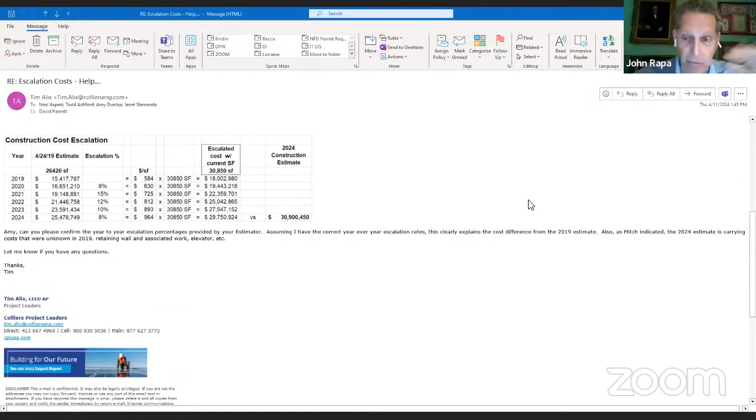So this form itself, I don't think is too digestible, but it helps tell that story in a meaningful way. Chief, you got some numbers on the FAQs as of, I believe, March 27th, where we show the number come from 43.49 to the range coming down. That's in the public domain.

That's out there. So let me show you what I've done since then, if I may. Hang on a second. If I can do this without losing where the heck I am. Hang on.

Northborough. Yeah. Heartland Fire.

I'll go up and share my screen again. I just did this today. So what I did was, can you all see this right here?

That covers the initial cost, the second cost, the committee, when the cost after we approved the geothermal, so it came back up a little bit just because of the numbers. Then the geothermal state and federal rebates, total minus the rebates, what the contingencies are, and if we don't have the contingencies, what the total would be.

Does that make sense to you guys? Yeah, it's going in the right direction. I don't know if I understand the very last line, total if contingencies are not used.

So the contingencies here, those may or may not be utilized in the construction process, right? We may not need any contingencies. We don't have any change orders. We don't have anything.

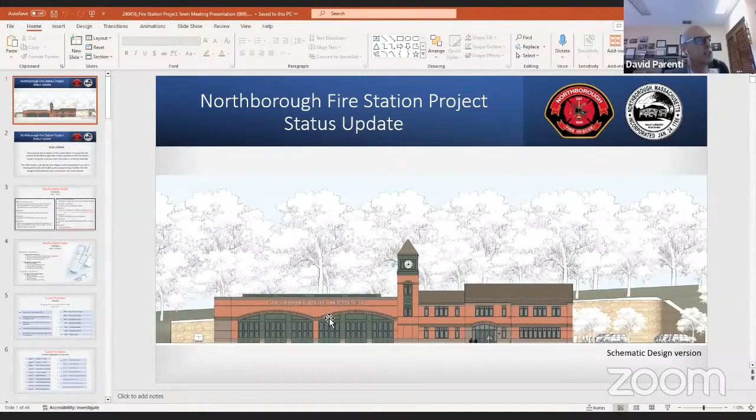So this is page 1 - this is the latest and greatest from HKT with the color scheme and all of that. Okay, we put a disclaimer in that says, hey, this is where we currently are, things could change. They're still in development, they're going to modify as the project moves forward, blah blah blah. So we don't want people to think, oh, this is what it's going to be.

We thought that would be - can you put punctuation at the end of those sentences? Mitch, you got a red pencil somewhere? They're free, you guys are a pain in the tush. My temptation would be to write on my monitor - that wouldn't work out too well. Thank you, hey, we're only getting started, Chief. You know what, you're lucky it's spelled right by a bunch of firefighters.

So, hey, we took the timeline and condensed it into one slide instead of multiple slides. Okay, same information you saw before, just all in one slide.

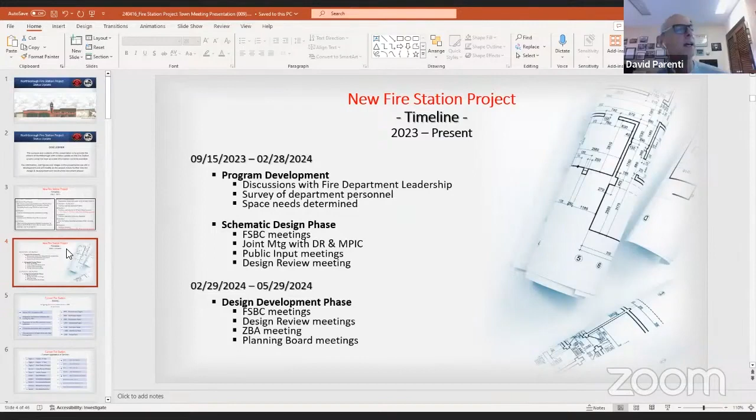We took the current state and condensed it all into one slide, trying to make it easier and quicker to go through. We're not going to read every single thing on here, but the idea is, this is what we've done so far, this is where we are right now.

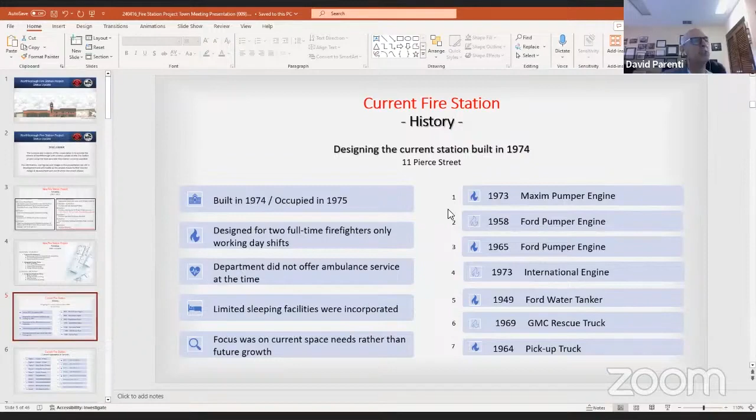We took the history and condensed it onto one slide. So here's the history of the station, and this is the apparatus that was in service then. Current apparatus - you guys have seen this before. Yep, you've seen this before, and you've seen this one before.

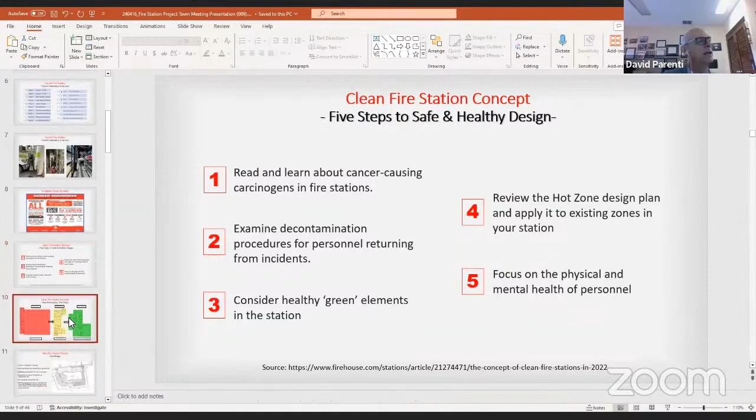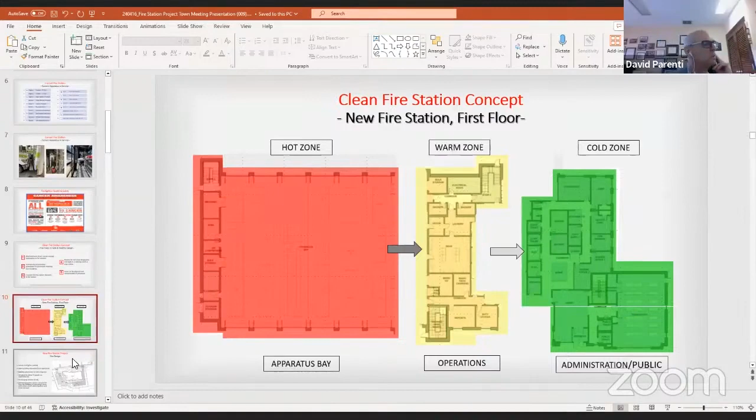This is cleaned up a little bit, it's a nicer slide to look at. It just has the 5 steps to a safe and healthy station design. The Deputy did this for me, much cleaner, looks much nicer. It breaks out the hot, warm, and cold zones, much easier to see, and labels them. Here's the site design.

So here's the first question I have: do we want to put this slide in there? This is the straight wall. Now we've decided we want the batter wall in the back, but the straight wall's on the side. We can get rid of this slide completely - I'm okay with that, that's detail we've gone past. There's a wall there, that's all.

Mitch, how much time do you think the chief has? Oh, I'm the last guy, I can go for hours. I think a lot of people are just going to leave.

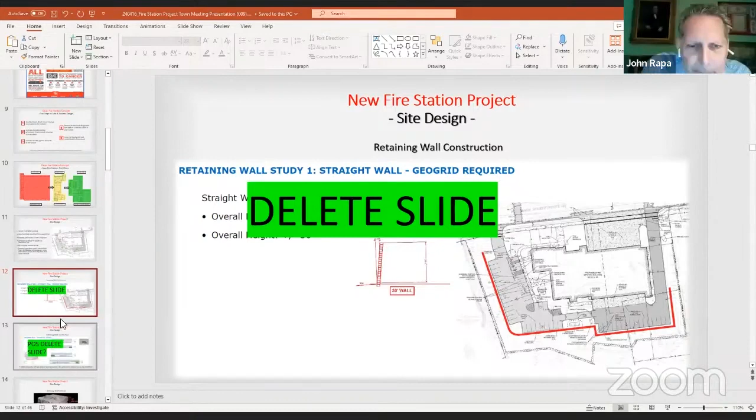I'm not sure if we should aim for something, but detail on the wall options we don't need - my intent is it's going to be more for the recording than the people that are there. So if people want to go back and see it, they can. I think we should get rid of that slide, take it out. Yep, I think we should get rid of this slide, get rid of the batter wall, yeah, okay, get rid of it.

This we wanted to put in, I thought this was important. This is what we picked for the wall - you guys haven't seen that one before. I think that's really an important slide for people to see what it's going to look like.

Okay, but that's a straight wall. It is a straight wall, which is what the side walls are going to look like, but it gives the design so you don't see that ugly wall.

You know how you can tell it's an engineered wall and not laid up walls when you have vertical joints stacked right here, so you can see the big blocks. There's six stone faces per block. But who cares?

So we can leave this one and get rid of this one if you want. What do you guys think? I'm not even convinced we need the first one. But again, the idea is to just give them an idea of how we got where we are, what we looked at. I could have put every single thing up there, and I didn't think it was necessary, I thought it was too much.

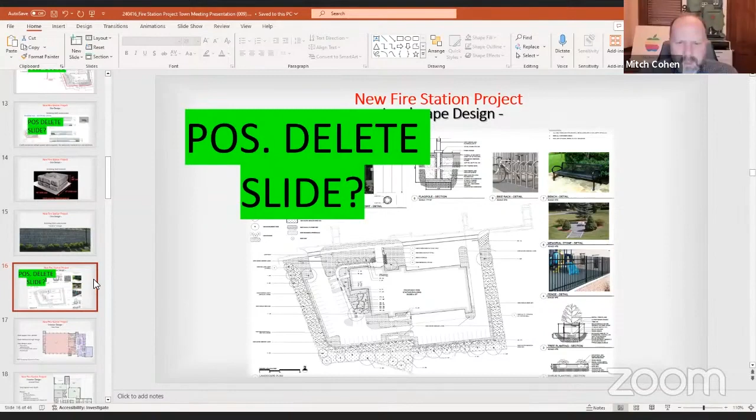I think we know we need a wall, and we're not recommending showing close-ups of the bricks that we chose for the building or anything like that - I don't have any of those. I recommend we get rid of this slide, the landscape design one, we don't need that. I agree with you.

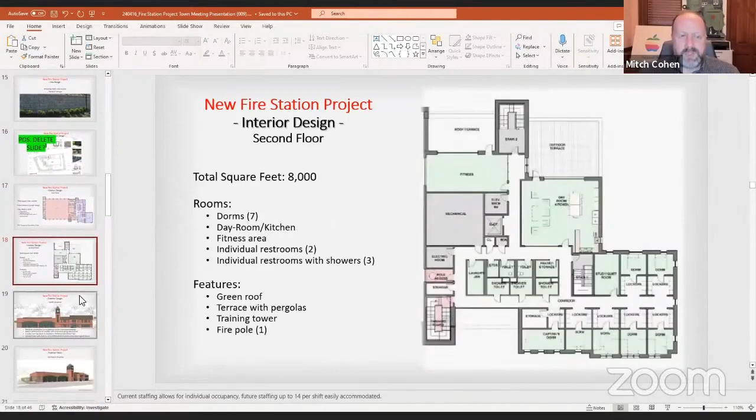And then this gets into the actual design, which I think is important, it's very important. Yeah, this is the function, I mean this is why we're building it.

This is the exterior view, and then all the views from the northeast, from the northwest. My intent is to zip through these quickly. Now, this one unfortunately - we're trying to get an updated image from HKT, I don't know if they have one. If they don't, I don't know if I want to use this because it shows parking on this side that isn't there. Yeah, I wouldn't use it. I don't think we need that many exteriors anyway. And here's just the other view.

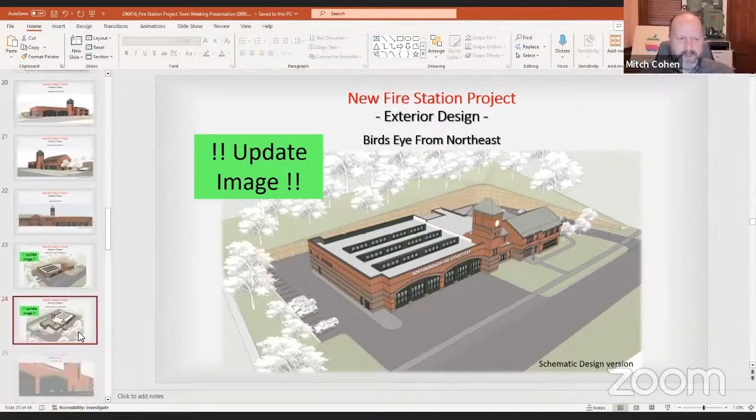Again, it shows the parking. So I would get rid of it. I don't think we need it even if we have the new version.

I agree. I like this slide, and I like this slide. I think they both give you a good look at what we're talking about.

Okay, this one, I don't know, guys. Do we need it? I don't disagree, but I'm just asking. Yeah, I don't think so.

I mean, it's nice, but it's not make or break. In anybody's scheme of the project, it's minutia. Don't disagree with you guys.

Now these things we're gonna delete. So this was all the stuff that was on Tim's that he gave us. I want to keep this for notes, but I don't think we need to have it as a slide.

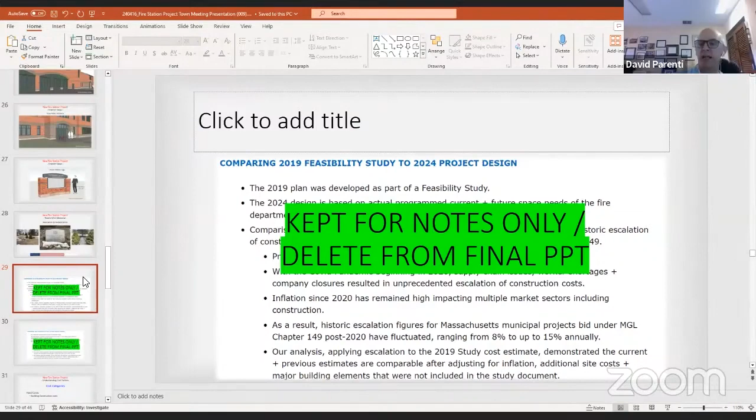Okay, agreed. That would be this one and this one, right? Talks about hard costs, soft costs, what they are, all that kind of stuff. I think, so anyway, use these notes to explain this. Does that make sense?

Hard costs are simply building construction costs. Soft costs are the other things. And then these are what hard costs are. These are what soft costs are.

Because they hear us talking about it all the time, but we don't really dig into what they are. So instead of using ones up here that are really more confusing, using this information here. Does that make more sense?

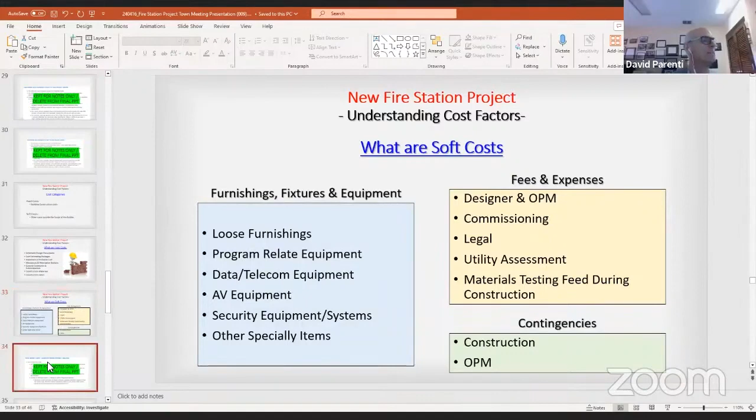Okay, same thing for this one. Don't need this, let's get rid of it. We'll use the notes, but let's get rid of it. This one here, use the notes and get rid of it. This one, I'm not quite sure what to do with.

Because the idea is to show them decisions we're making as a committee. And we've gotten rid of this, we've gotten rid of this, we've gotten rid of this. I would leave it as: when we talk about the price range, there are still decisions left to be made.

Okay, and I'm okay with that. You guys okay with that one? This is a good slide. If somebody asks, the ones without the X's haven't been decided on.

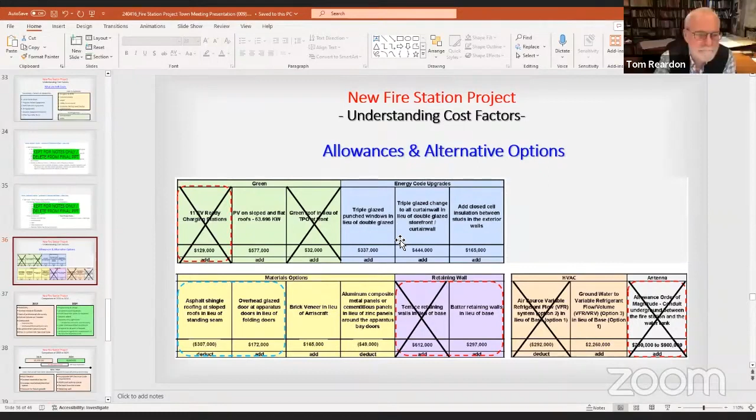Right, these we probably don't even have a choice on. Right, we haven't discussed the energy code. Okay, right, so we can get rid of it completely, not a big deal.

So this code goes into effect -- it's already in effect. No, it went into effect January 1st, not July 1st. No, that's one phase. We have multiple layers of energy code. This next one's coming in July.

This is a comparison of the two, because we keep getting questions on it.

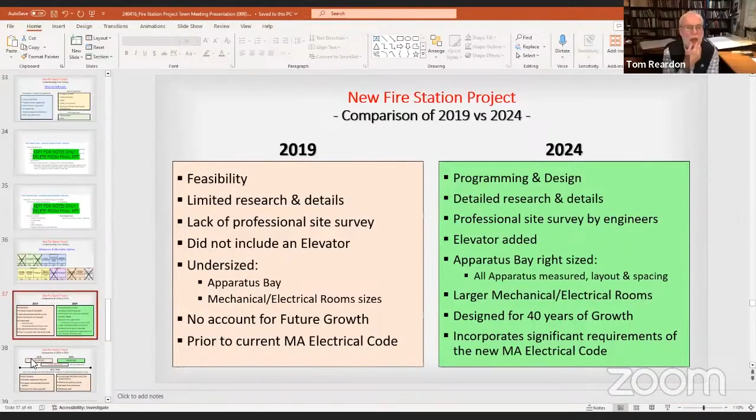Just a further comparison of why we added the square footage, the elevator, all of that -- that's a good one, right? So they understand this. We didn't just arbitrarily say, 'Oh, we want more room.' No, it's because this is why we need more room.

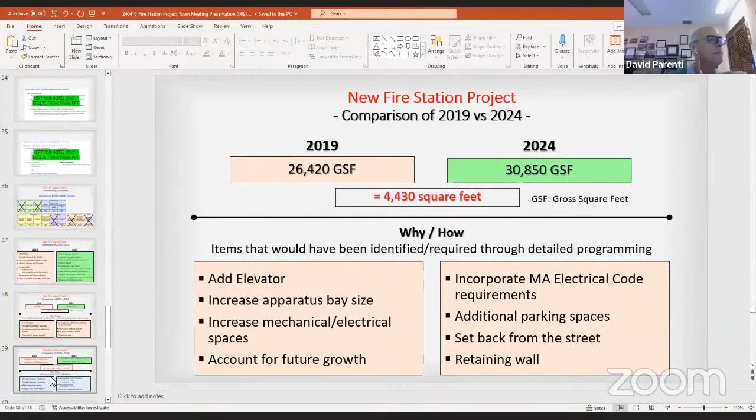And again, this should be in line with the thing we were discussing earlier that's on the website. Yep, and the deputy and I, what we're doing is if he makes changes, I compare him. If I make changes, he compares it. So we're trying to cross check, keep it safe.

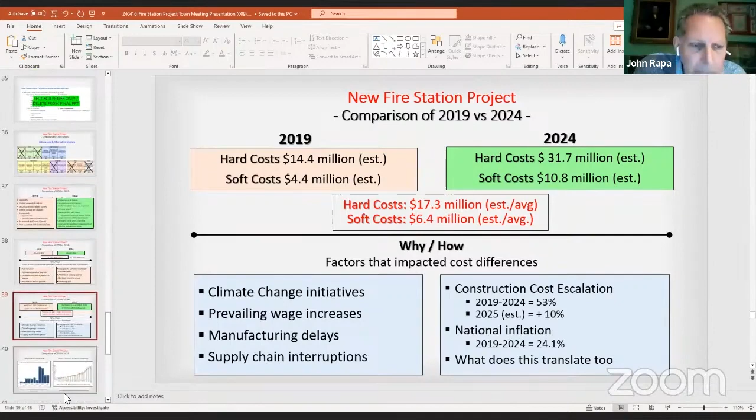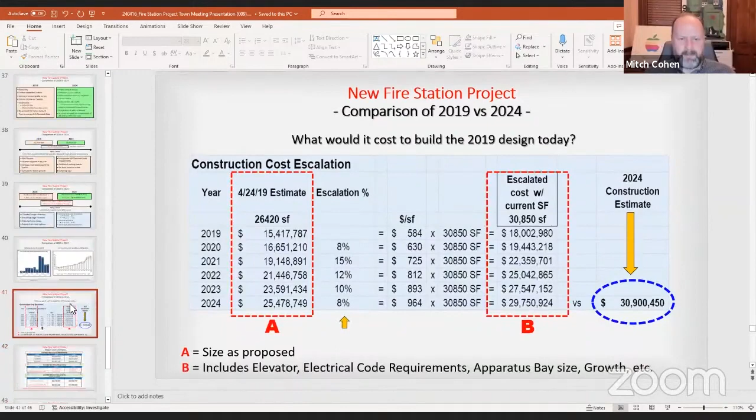It's up to you guys. I can leave it right like it is, or get rid of it and not use it at all. Okay, that works.

My concern is you don't lose the audience, assuming we got a good number of people still there. I don't disagree—throwing slides at them, their eyes are going to roll over. Well, I told you we have to get rid of a bunch of slides. Mitch, this is taking that information we just shared and putting it in a little bit more digestible form.

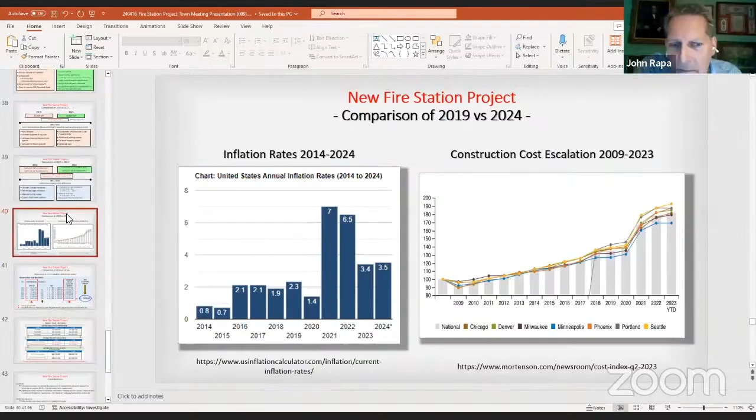I kind of think this looks pretty good. I like this way better than the previous one. We had the two graphs because you can talk to the second one, the following one, Chief. You can talk to that. I agree.

Hang on a second. If I don't do this now, you know what's going to happen, right? Just saying, because I know myself very well. Okay, so we have this one, and then...

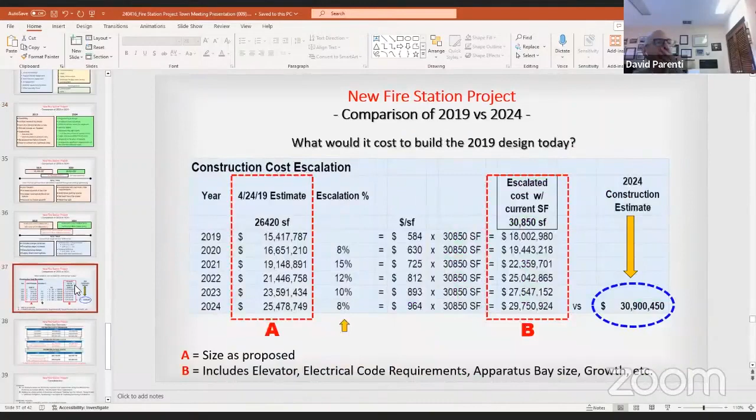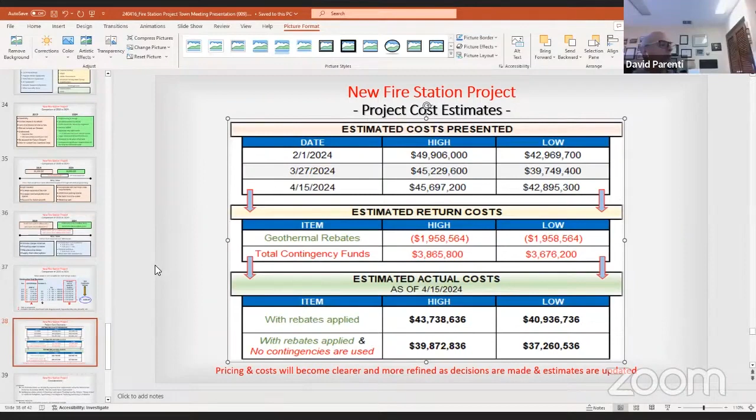I know it lowers the number, but I feel dishonest implying that we won't use contingency funds. I can't tell you how many times I looked to make sure this number was right, so I wasn't giving the wrong information. I agree with you, Mitch—I don't want to put numbers out there that appear to be for the sole purpose of lowering the number. You know what I mean? I want to be accurate.

That's a known quantity, and that one's interesting because it can change based on two reasons. The Mass Save part of the geothermal rebate is based on the tonnage of the units installed, so if as it goes through design we need something a little lower or a little more, that could change. The federal one is based on percentage of costs, so if the estimated cost comes in a little less, the rebate will come down a little too—but that's okay because the cost went down as well. We can do that.

And on that one, I guess you've got the two columns of high versus low. Obviously it doesn't change—I'll just flip them so it matches everything else.

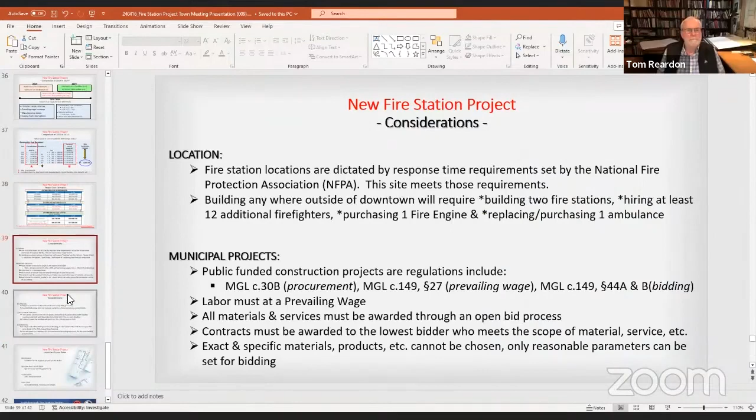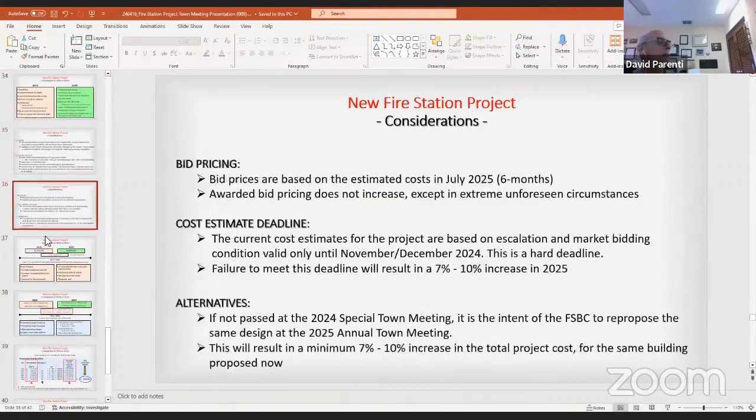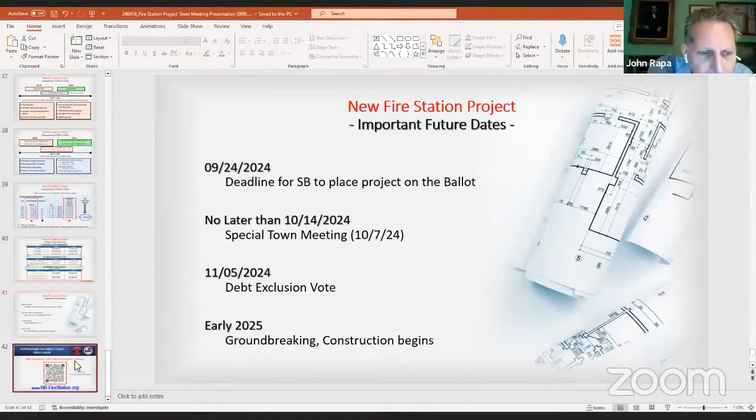We thought the important future dates people need to know about, and then the QR code. Yeah, and then I'll still get rid of that.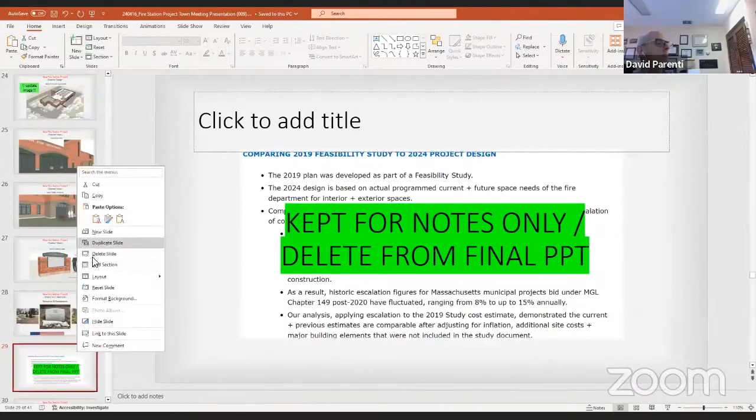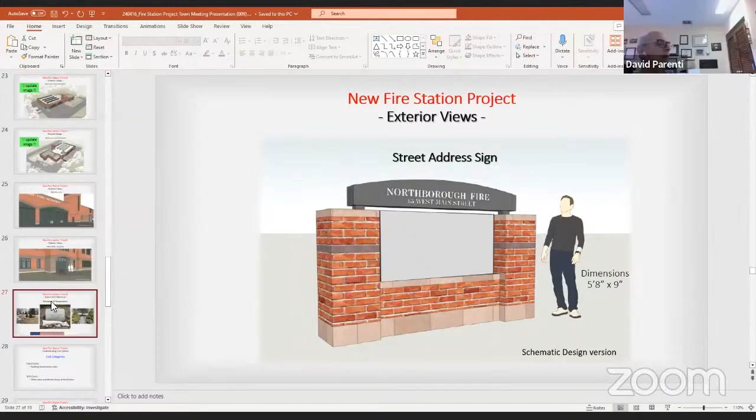We talked about this—what did we decide? Delete it. Thank you. I couldn't remember that one. I knew this one, but I couldn't remember the other.

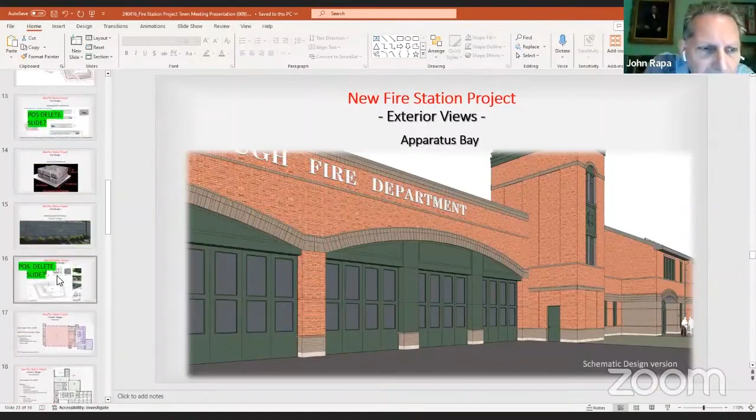So how many slides you got, chief? Hang on, I'm not done yet. About 30-ish, I'm still deleting.

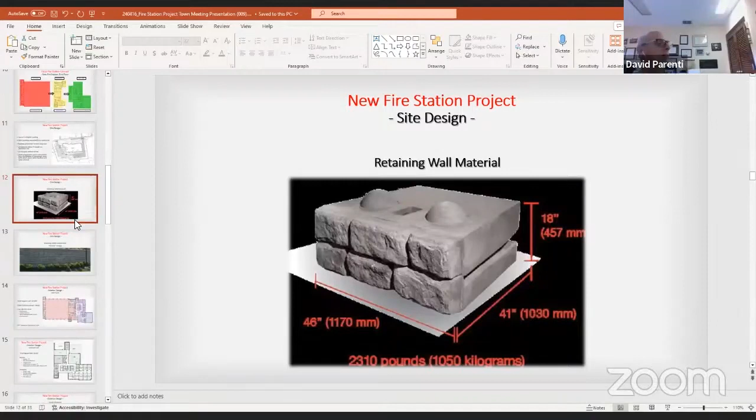I'd get rid of the retaining wall material. I thought I just did, didn't I? So you got rid of the wall, but not the block. Oh, we're talking about the block itself. Yeah, we don't need that—that's detail.

Yeah, get rid of that one. If you want to do that, we can get rid of this one too. Well, I think we need an overall site plan. Yeah, okay.

And that brings us down to a more manageable 31 slides. Yeah, all in, so that's not too bad.

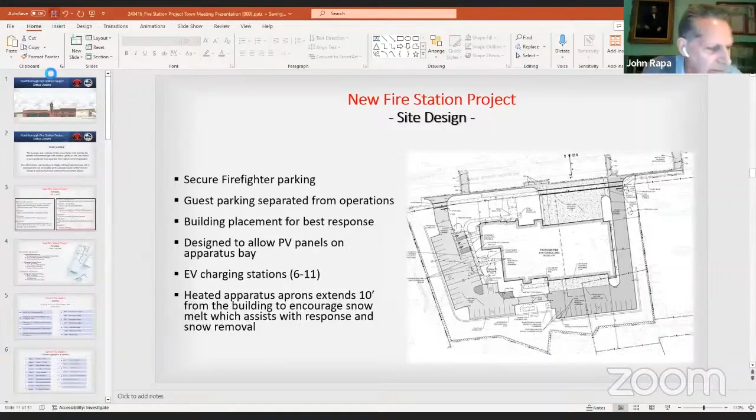All right, you guys okay with that? Chief, do me a favor—go back to the web page we were on before. Hang on a second.

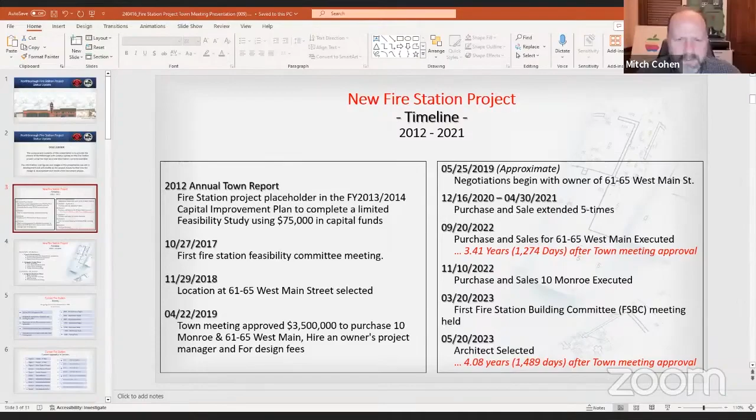Hang on, I gotta stop sharing and do a new share, because I didn't share my screen—I shared the application.

Okay, what do we say for the design—caught me after we left this screen. I forget who suggested putting in the design development phase.

Yeah, that's probably Tom. Well, maybe it's the way that it's there—so that the costs we are basing this on are based on the schematic design estimate.

But we're working on this design development phase. Okay, so we may change that to schematic.

I don't know, let me see what it looks like there. I would put—

If it were me, I would remove design development phase, but then on the February 1st—I thought that was February 29th, whatever it was, whatever that date was. Yeah, that was just the date we got picked off the schedule.

The 49.9, yeah. Okay, get rid of this—was mid to late February, Mitch, as I recall. Yeah, whatever that is, I would call that the schematic design cost estimate.

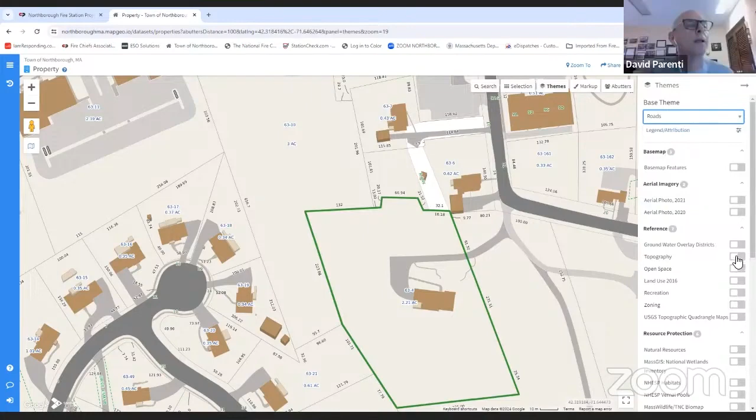Monroe, can you click on the contours? Topography—keep going down. No, it's down here, I'm just trying to find it. In reference, go down the next box. Oh, I know what you mean. Yep, hang on, down here. I've clicked it on more than one occasion. Okay.

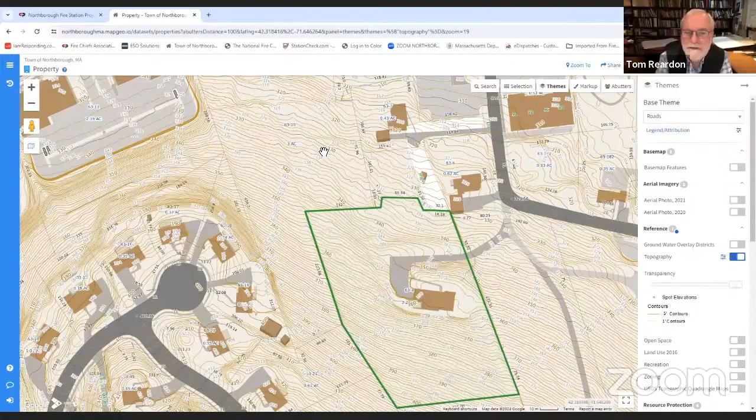So see, 350, 356, 362, 366, 358—you know, that's 56, 58 feet above the fire station slab. So it's up there, it is.

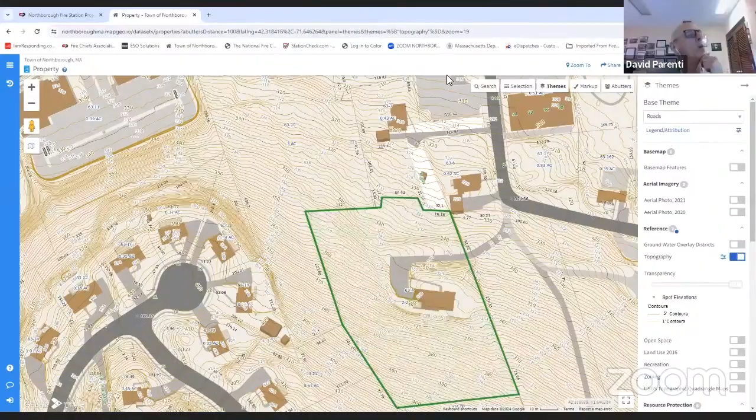So I've invited her down to the station anytime to come down and talk to us so we can explain what's going on and how we got where we are. And I feel horrible that she didn't know about it before she purchased. I mean, I'm kind of surprised, to be honest with you, that the realtor—because it's not like this happened overnight, you know?

But yeah, hopefully she'll take advantage and come down. I don't think the sirens will affect her at all because they're facing the other way for the most part. And again, with the preemption system, unless things are horrible, we don't use the siren 24/7, 365. We just don't do it, you know? So I don't think that she's even going to know we're there for most of it.

Is that the woman that came to the meeting last month? Yeah, yep, yes it is, okay.

And the construction of the fire station itself will be a very good sound deflector of the noise coming from Route 20, because you want to put the barrier as close to the source of the noise as you can, and that's exactly what the fire station will be. So building the fire station will actually make her site quieter. Sure, because everything will be in front of the station. Right, yeah, makes perfect sense.

Okay, folks, anything else? That's it.